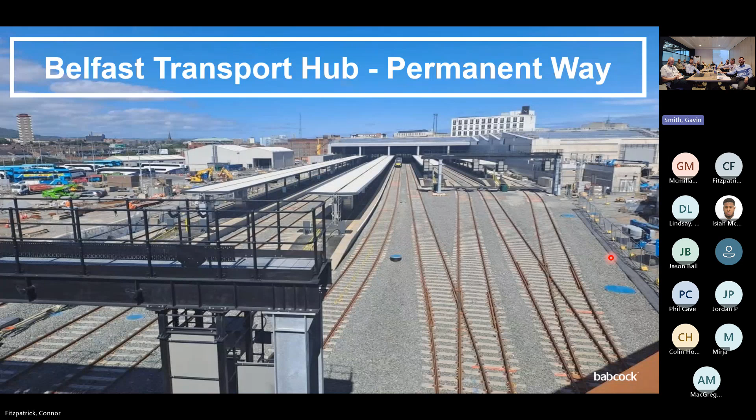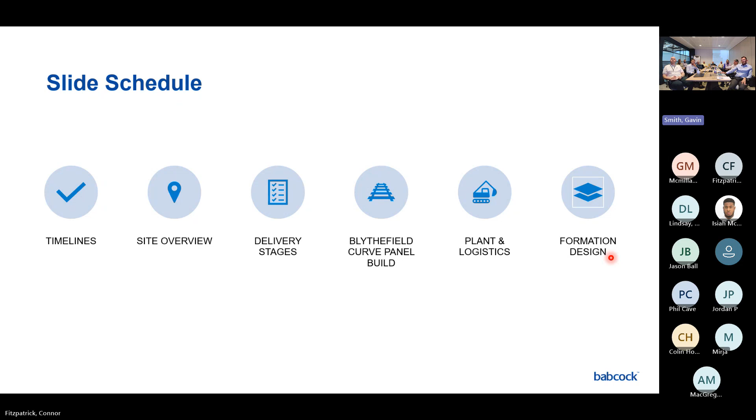Just a quick overview of the schedule for the slides. Kicking off with the early stages, the timeline back when we first started detail delivery, coming through to the actual production timeline up to completion. A quick site overview to help get you up to speed on whereabouts the project is, then moving into the delivery stages, and delving into more detail with the Blythefield curve panel build. I'll talk about some of the plant we made use of, and finally we'll touch on the formation design, which is quite substantial and leads nicely into Ryan's talk where he covers more on the formation.

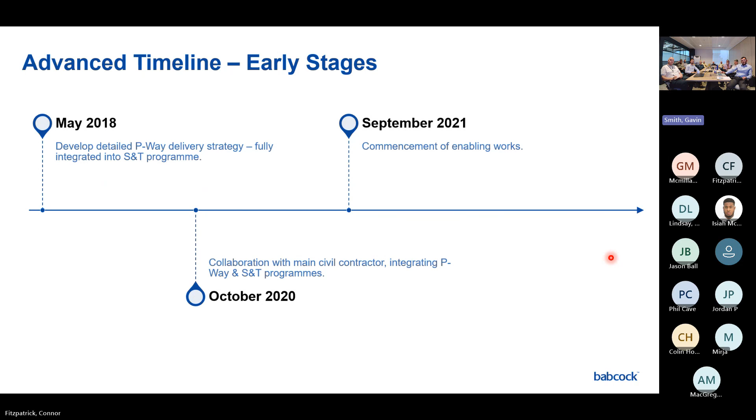Early stages, advanced timeline: we go back to May 2018, when we developed a detailed P-Way delivery strategy, integrated into the S&T programme which had already commenced. That took us up to October 2020, collaboration with the main civils contractor, FSJV, who were building the station and the platforms. Then September 2021 was the commencement of the enabling works.

More on the delivery schedule, P-Way specific: early 2023 was the first of any advanced prep works. Then breaking ground essentially in August 2023 on the non-operational site, within the new platforms, working our way out to the existing boundary fence. Moving up to April 2024, the first disruptive blockade, a small blockade allowed as almost a trial run before the big blockade, May to August 2024, a 13-week blockade. It was split into two parts, which I'll touch on - one part was reduced possession, and the second part was a all line block.

Into Belfast City Centre, and then the autumn of 2024 was the commissioning period.

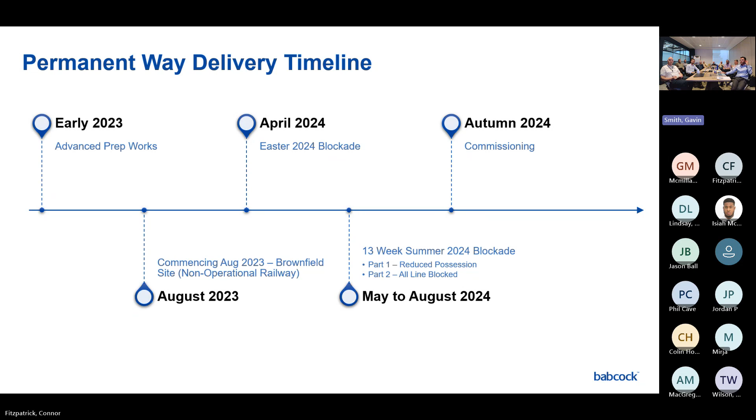Moving on, I thought I'd touch on the old Great Victoria Street station, which was replaced by Belfast Grand Central. You can see in the picture 4 curved platforms, which with maintenance and platform clearances etc, and it was jointed track. Translink really wanted an increased number of platforms to allow for the increased frequency of the Dublin lines, so they took that up to 8, and one of the big changes was straight platforms, just to reduce the maintenance.

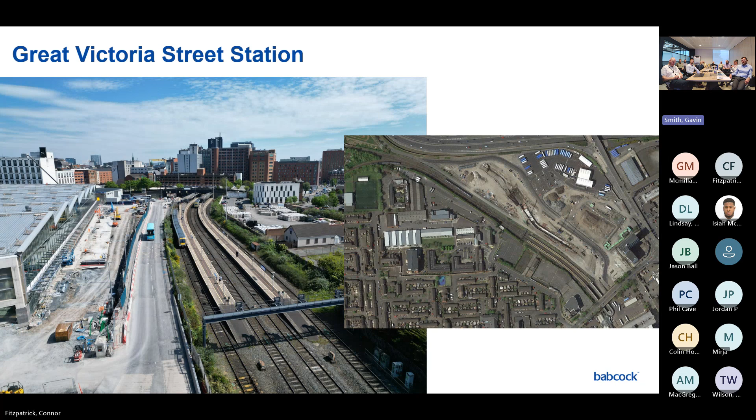Moving forward, in a site overview, we split the job into a number of stages, really dependent on the windows for the blockades or the windows of opportunity of work that we could do. You can see in the top right there is the new platforms, which we referenced as the brownfield site, where all the work was carried out prior to taking any blockades. The rest of the stages are split up dependent on the area of the job, with three compounds servicing it.

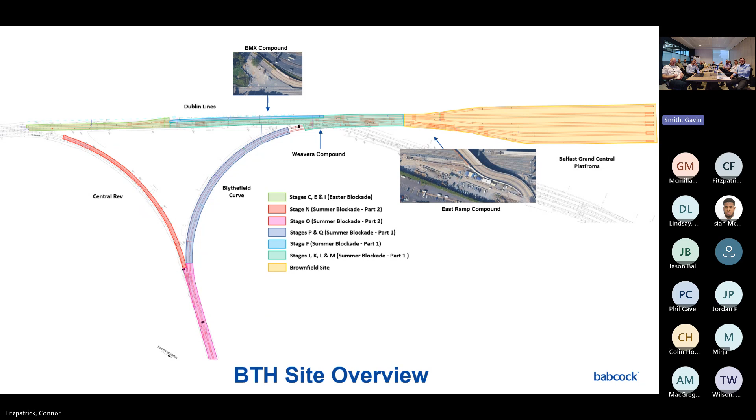So the East Ramp compound, which was initially sandwiched between the old station and the new station. Then the BMX compound at the top of the Dublin lines, which was sandwiched between the station and the Westlink Junction motorway. Tight areas to work within, with a small compound at Weaver's compound, but that was for rail only. The compounds are really servicing one area of the job - your likes of stages N and O, the red and pink, do not have direct access, which was one of the challenges.

So kicking things off, we took over the brownfield site basically from FSJV. Within this area, they were actually contracted for the formation build-up up to ballast level and any associated drainage that you'll see there on the left-hand side. Then we were to come in and build the ballast and the track components on top of that.

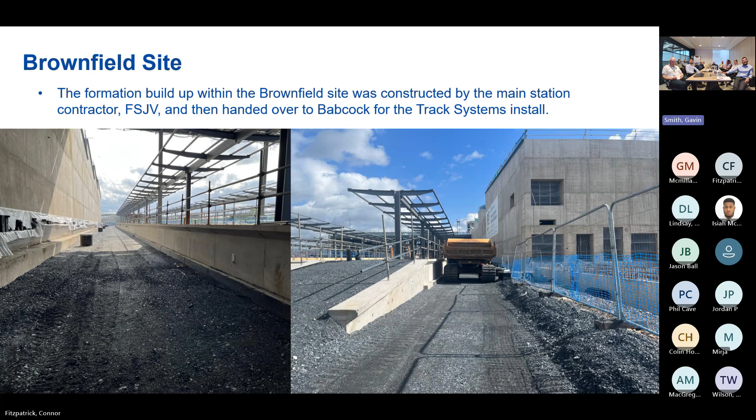So now I've got a picture there looking out from the station. We start to progress on the platforms. This work was completed between August and December 2023, whilst the old station was still fully operational - you can see trains there at the top of the picture still running in and out. The brownfield work allowed us to remove substantial work from the main summer blockade, easing pressure on that delivery and reducing disruption to the public overall.

It's worth noting at this point, huge integration with the main contractor. Obviously, if we were looking to work within platforms 2 and 3 laying track, they were unable to work on the 2 platforms, so substantial integration day to day on this.

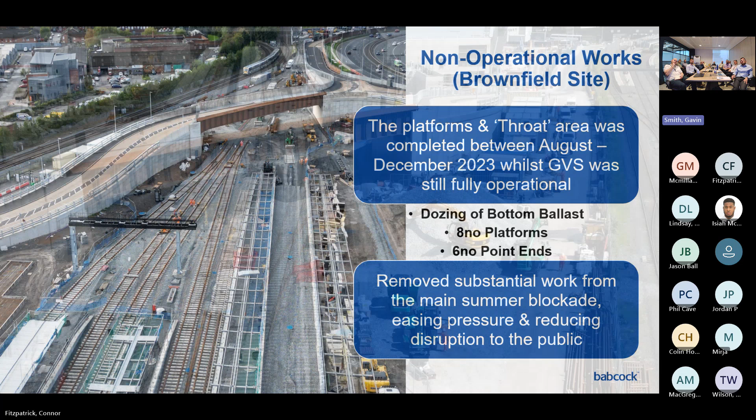This is the picture, you've turned round now, the build's progressing from the station outwards under the busway bridge there. You can see on the right hand side the station, and then in the centre is what we're referring to as the East Ramp compound. So tight access road to manage, and not a lot of room when you're servicing the full works there on the left hand side from the platforms out. Just showing you the tight access points that we had.

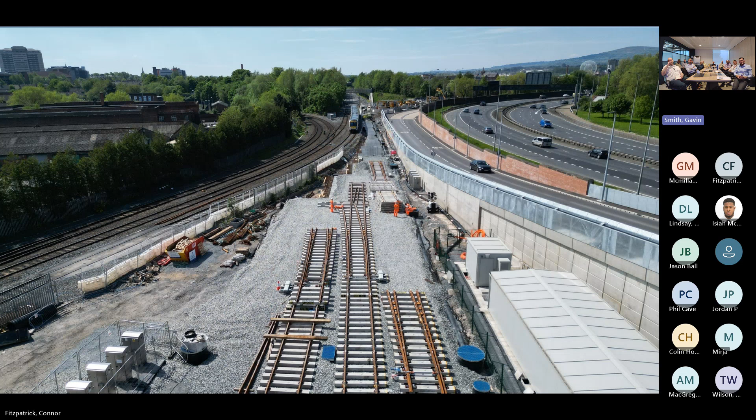We've swiveled 180 degrees, so we're now looking from the station outwards. The brownfield site's key objective was to build as far out to the existing boundary fence as we can. You can see there we've actually half built units S and C prior to getting access to the railway. And on the top of the picture there, between the train and the road, Ryan will touch on it later, but you can see there's actually an area of the concrete foundation slab already poured as well.

So that then took us into the Easter blockade. That was the first disruptive works - basically a length of 170 metres of plain line with formation works on the up Dublin and another 185 on the down. The key point to this was installation of 778 points, which was the commencement of the new line. The existing infrastructure Dublin lines only had 2, the up and down Dublin. This was now to facilitate trains in and out of platforms 7 and 8 in the new Belfast Grand Central.

As it says there, this gave us only a 29-hour possession. It gave us an opportunity to carry out some time motion surveys in preparation for summer and assess the effectiveness of compounds that we're using.

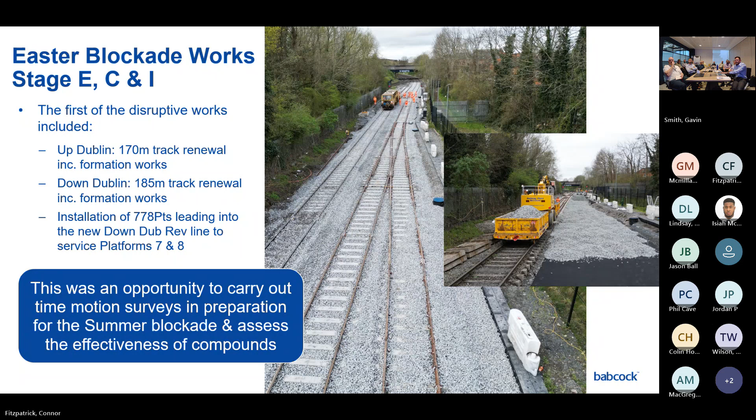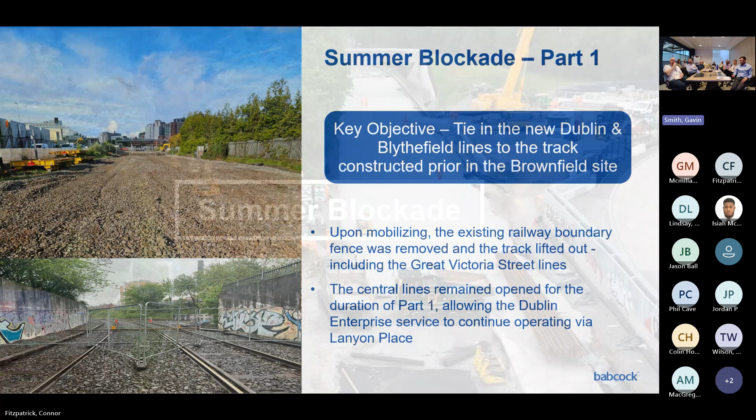So that took us into the summer blockade, 13 weeks in total. Part 1, we still had the central lines open, so still had to facilitate the Dublin Enterprise service, which was travelling into Lanyon Place.

Key objective was to tie the new Dublin and Blythefield lines to the track constructed prior. So we've built out as far as we could. This was now about tying in the new lines into the new station. Upon mobilising, the existing railway boundary fence was removed and the track lifted out.

Top left was the old lines into the old GVS, which we then removed. You can see the east compound on the left-hand side, which eventually gave us scope to increase our compound out into this area. As I mentioned, it allowed for the Dublin, so I've just put a photo there of the physical barrier for the work site.

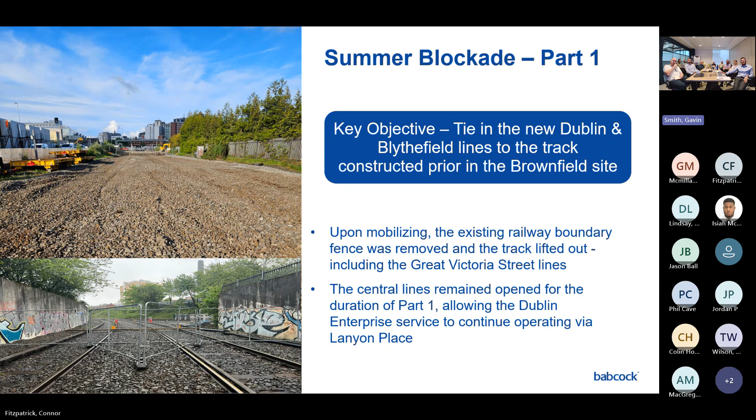So again, Ryan will touch on it, but I thought it was pretty important for me to mention it with regards to the programme for our work.

So a huge part of the summer blockade was the completion of the foundation slab, which formed part of the formation detail. The installation of the slab was a critical activity in the deliver of the summer blockade. Any delays to it would have pushed back the subsequent installation of the track above. So we built in some time and err on the side of caution within the programme, but that was always a risk if that overran, that it was going to push back the construction of the track above.

And I've just put a note there. You can see essentially cut off the brownfield site from the works at the top of the picture. So we had to build in an access road there on the left-hand side just to connect the two.

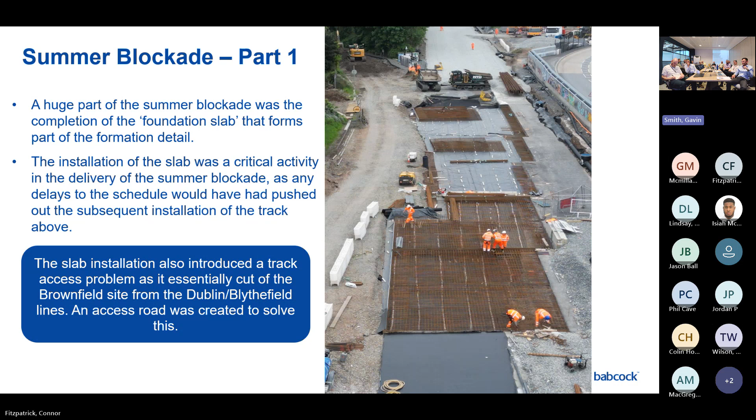Carrying on the summer blockade part 1, what we were calling stage M, that was the Dublin lines. So stage involved the following works.

So formation build up across 3 lines. You can see in the picture different crossfalls to each cess with a build up of 6F, type 1, different layers of terram, etc., which I'll go into in more detail in the formation build up. Transitions between the formation, doze the bottom ballast levels, and then in this stage, it was 800 metres of plain line and the installation of a crossover.

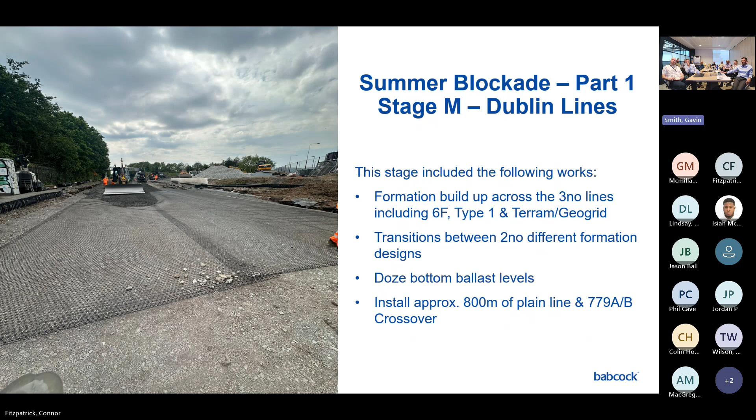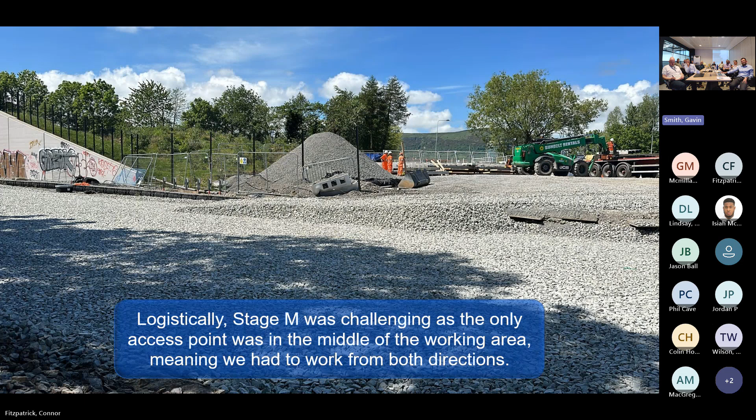And then this just gives you an overview of that. So you've got the 3 Dublin lines there, and you've got the BMX compound on the right-hand side. So you can see our access was actually coming onto the middle of the job. You can see at the top the 779 crossover mid-installation, and that's the 3 lines that would then go down and service the new station.

So continuation of part 1, moved into stages P and Q, which was the Blythefield lines. Methodology a little different, involved the same formation build-ups and those in bottom ballast levels. Also the introduction of some drainage, which we installed in the 6 foot, which was good.

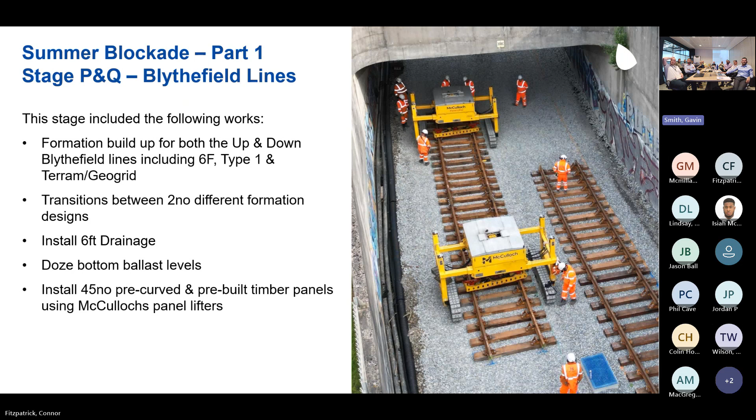So it allows us, while we're building the formation, to build the drainage at the same time for optimal production. And then we installed 45 number pre-curved and pre-built timber panels. Very tight radius here, between anywhere from about 184 up to 250 metre radius. These were installed using the McCulloch panel lifters, and I'll go into a bit more of the engineering on the panel build later on.

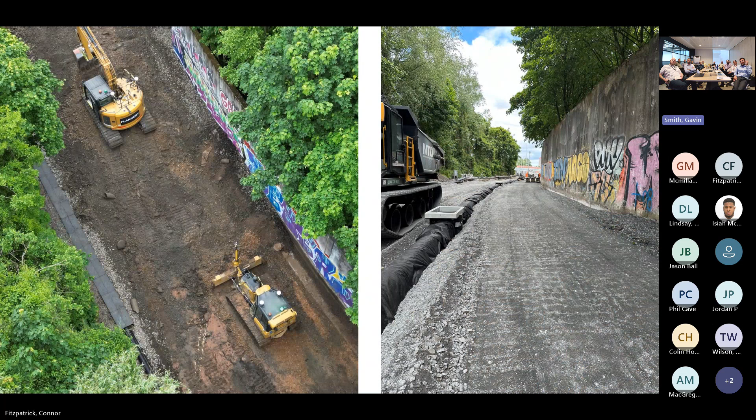Just some more photos there, give you an idea. So on the left, that's us excavating the full Blythefield curve. And then to the right hand side, we've started to build up the layers of the formation. We've installed the 6 foot drainage, beginning to compact it.

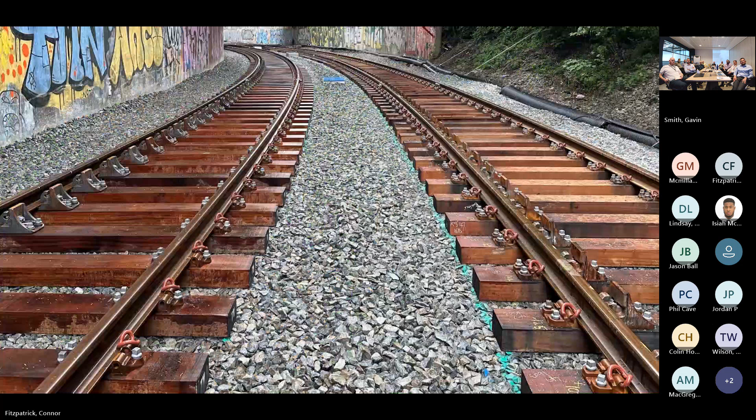And then just a kind of post install of all the curved panels. So you can see that that's pre-tamp. So building the panels beforehand with the pre-curved rail really made a difference to the quality of the install that we were able to provide to Translink.

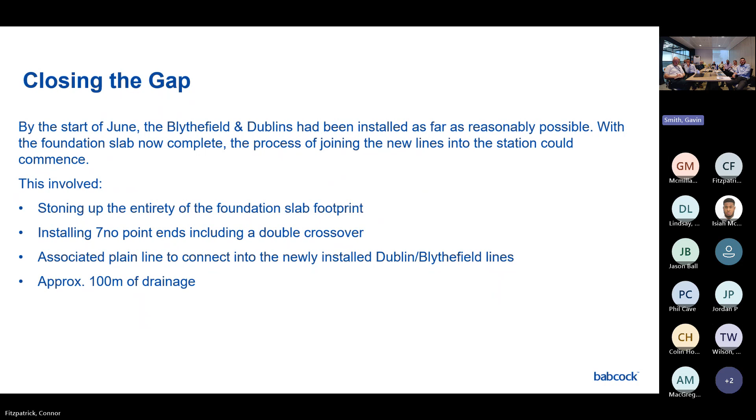That took us on to what I refer to as closing the gap. So at the start of June, Blythefield and the Dublins had been installed as far as possible, with the foundation slab now complete. Process of joining the new lines into the station could commence. This involves stoning up the entirety of the foundation slab footprint, installing 7-point ends, including a double crossover, associated plain line, and 100 metres of cess drainage.

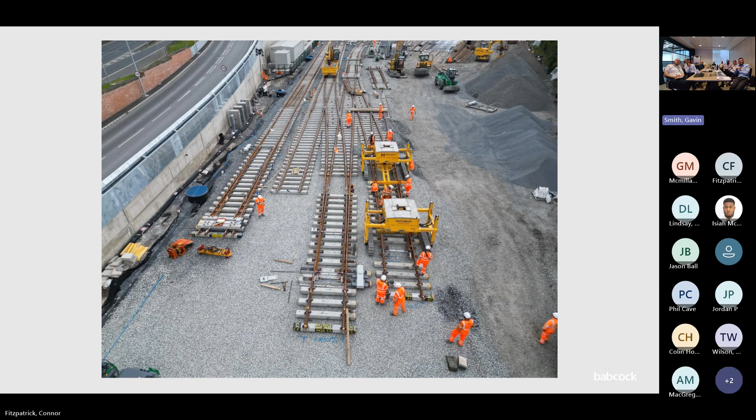You can see just another photo. To the top of the picture is a brownfield site, so you're now working out. We've now got the third line on the left-hand side emerging, double crossover being installed with the two nearest switches, the alpha side 782 and 783 going in using McCullochs.

Which led into the final product for the end of part 1, looking like that. So we've now got access from the Blythefield lines on the top left, the 3 Dublin lines now all going into all 8 platforms of the new central station. And probably at this point, that was the end of the 13 weeks, a huge milestone in the project to have the new infrastructure connected into the existing.

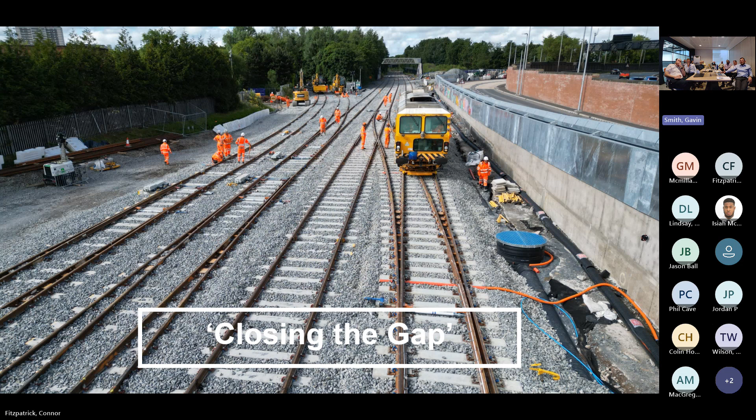That leads us into part 2, which, as I mentioned earlier, was then full line blockade. So the 2 central lines being blocked, the Dublin Enterprise could no longer come into Lanyon Place, with bus replacements instead. But the main works in the central reverse was a reconfiguration from 2 lines down to 1. Now with the main station at Belfast Grand Central, there wasn't the need for 2 lines on this central reverse, and it would only be used sparingly when required. So we dropped it down to 1 line.

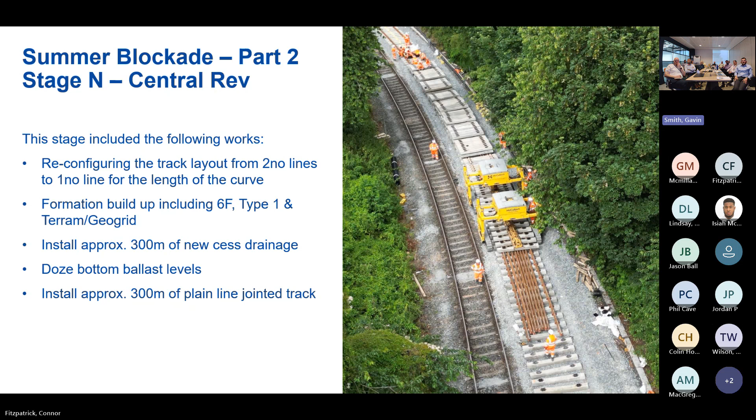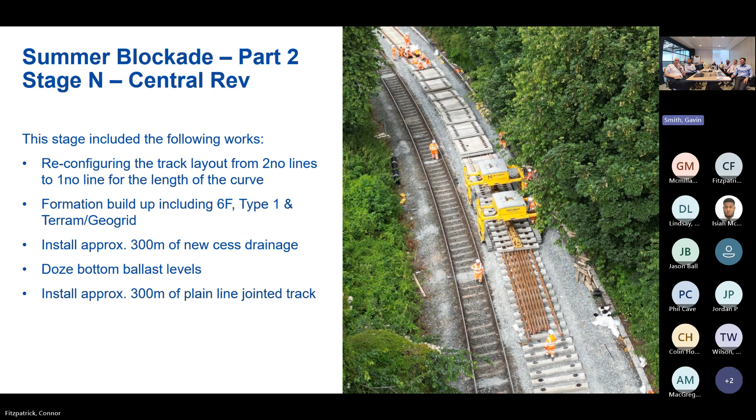Again, formation build up, new cess drainage, and new plain line jointed track. You can see in the picture on the right, we left the existing track in for as long as possible, until the intersection point with the new single line alignment. That allowed us to stockpile sleepers as far down as possible, and then we could run the remaining ones with the sleeper beam where we didn't have any service road, which you'll see in the next couple of photos.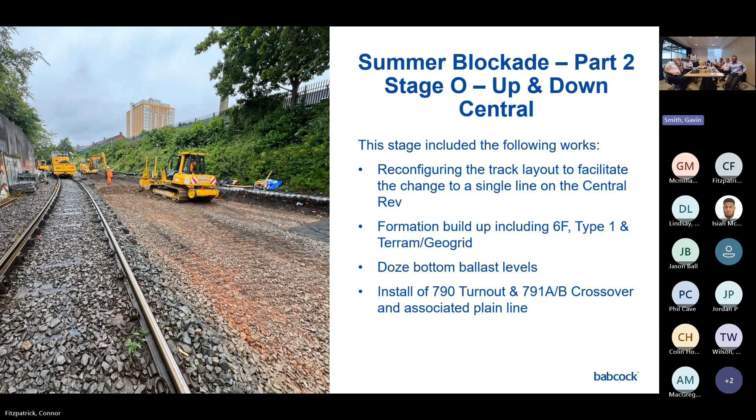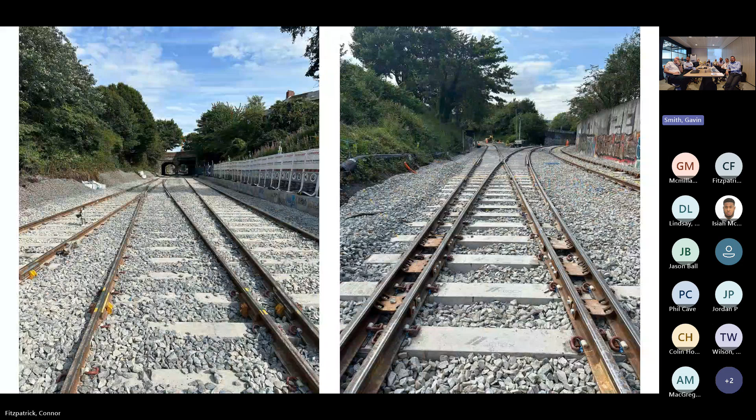Which left the final product, and on the left there's the crossover that's now tying in back towards Lanyon Place into existing infrastructure, and the photo on the right is now looking up the Central Rev that I just spoke about. So at that point, summer blockade, that was all the works complete, all the railway infrastructure essentially tied in. So after the delivery stages, I just want to dive into a couple of areas.

We've got the pre-curved panel build, as I've touched on earlier, the Blythefield lines. So the design was confirmed as to be jointed track construction with an accompanying check rail arrangement.

Now, I suppose a number of factors obviously to consider for Babcock as a delivery contractor: installation methodology, would we build it loose or would we panelise the curve? And then following on from that, would we order a lot of pre-curved, pre-cut rails, cut to suit rail lengths?

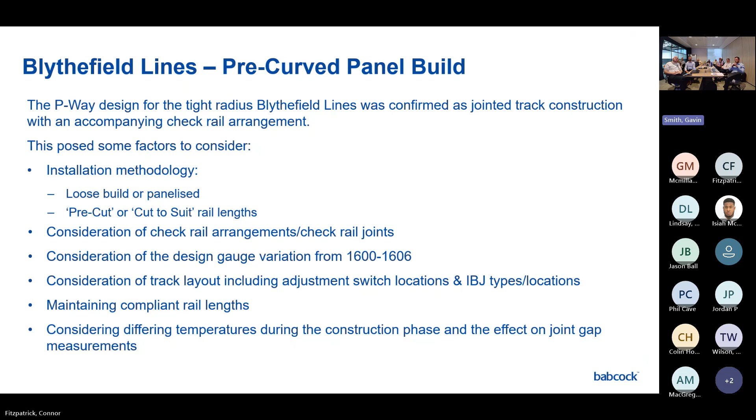That's consideration of the check rail arrangements and the check rail joints, and then also taking into account the design gauge variation. So due to the tight radius of the curve, the gauge actually went out from 1600 to 1606 and then back in. Taking into account adjustment switch locations within the curve, as well as IBJ types and locations, maintaining compliant rail lengths, and then also considering the different temperatures of construction in regards to joint gap regulation.

So our chosen methodology was to panelise the layout. This involved ordering pre-curved rails and IBJs, designing with a mixture of predetermined rail lengths and cut-to-suit pieces, allowing for some constructability tolerances.

We went back to first principles to establish leads and lags, using CAD to design each panel and ensure accuracy when constructing. A panel schedule was created to ensure correct order of construction and installation, and again we made use of McCullochs, which allowed us to install both roads at the same time, working back towards the compound.

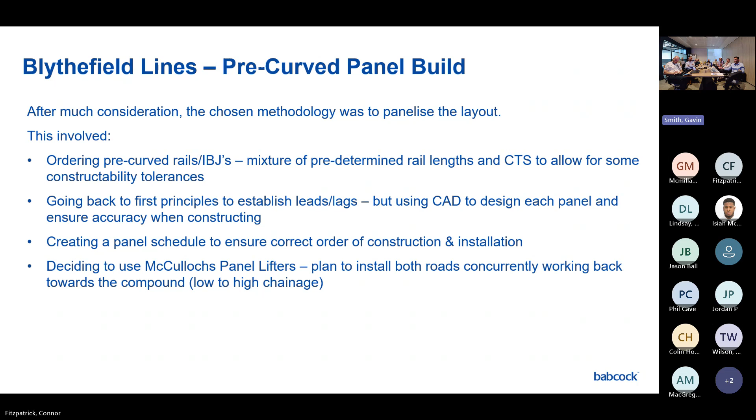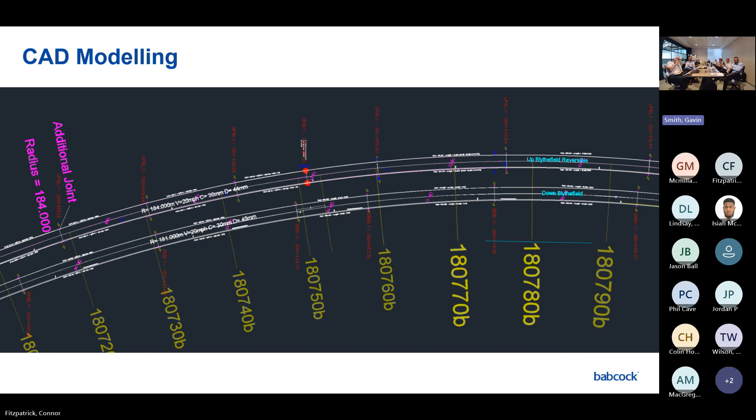Here's a snippet of what we ended up overlaying. You can see the small pink writing with labels of the panel numbers and where the joints fall. That was overlaid against the existing P-Way design CAD file.

From that, we were able to pull out panel diagrams. Each panel diagram showed the length of the rails, both inside and outside, sleeper spacings, the radius, and the gauge. The pink writing on the left and at the rail ends was how it came up from factory, to allow for easy identification on site. These diagrams were given to a team who worked on building these off the critical path, in the compound.

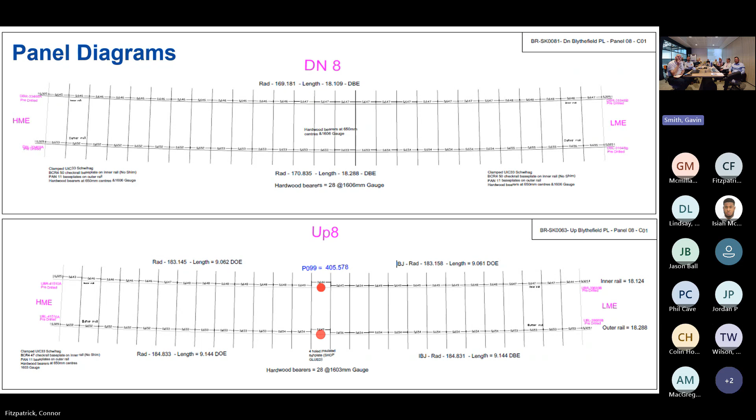Moving on to some of the logistical challenges. The hub was always a challenge due to its location within the heart of Belfast city centre, so interfacing with the main works contractor within the station area was an ongoing challenge.

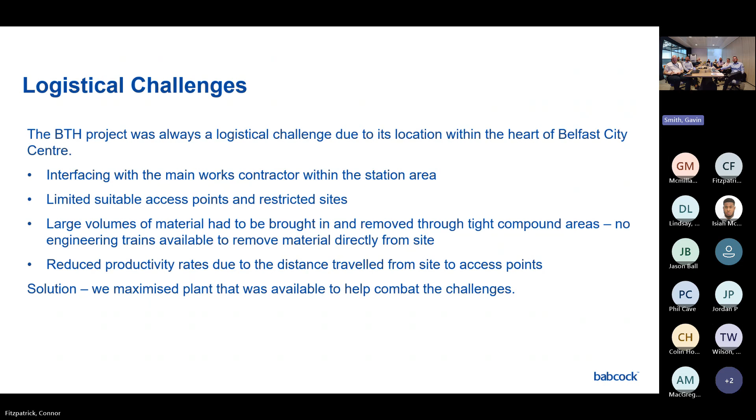One of the solutions was to maximise the plant available to us over in NI to help combat some of these challenges.

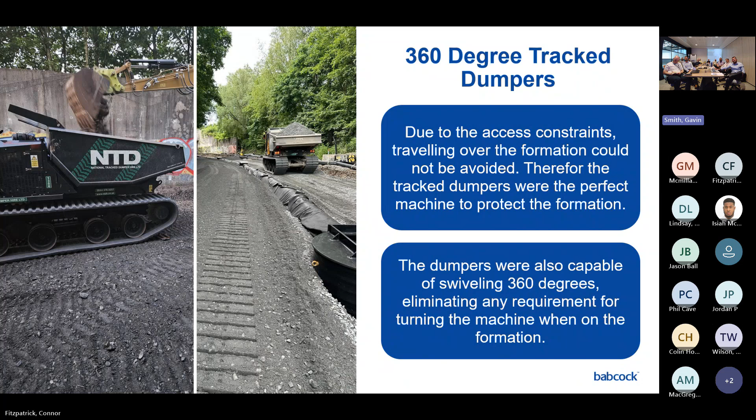We also set up what was as close to an engineering train as we could, using a Unimog complete with trailers. This helped massively during part 2 of the blockade, where there was limited access to the further away sites.

The trailers could be used almost like side tippers, similar to a conventional side tipper engineering train on the main line, and they could also stone up almost like a mini ballaster as it travelled over site. These were a great help during blockade part 2.

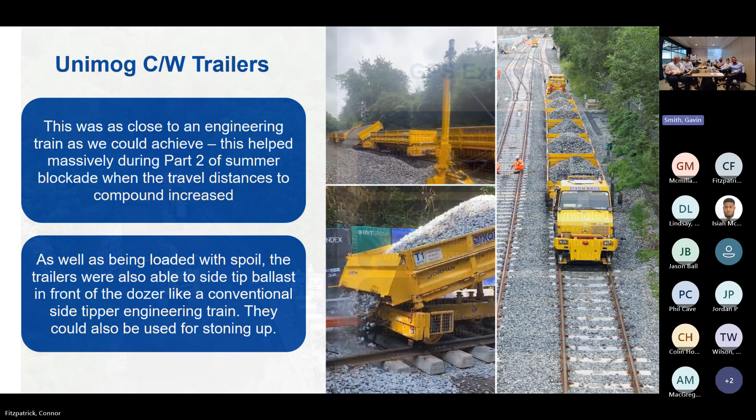We also used GPS excavators, given the limited space in compounds and large volumes of material to remove. GPS excavators made this as efficient as possible - machine control files eliminated the chance of over digging or digging too wide, and we also created drainage excavation files which increased production as well.

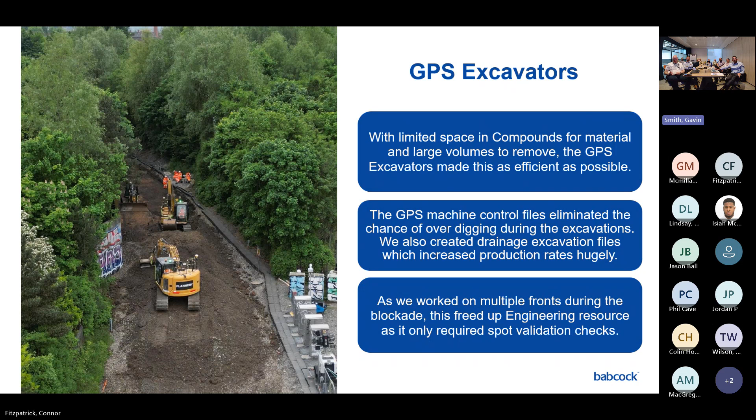GPS allowed us to work on multiple fronts and freed up engineering resource, as the machines only required spot validation checks because they already had the file loaded in the machine.

Moving on to the final thing - the formation design. It's quite substantial. Here's a snippet of the main throat area showing the different track formation solutions. Solution B, top right, is the foundation slab, which Ryan will touch on. The other one not in sight is track solution E, which was within the brownfield site produced by the main contractor.

I'm going to focus on the next slide to give you an idea of the transition between the pink and green on the drawing - transition detail 2.

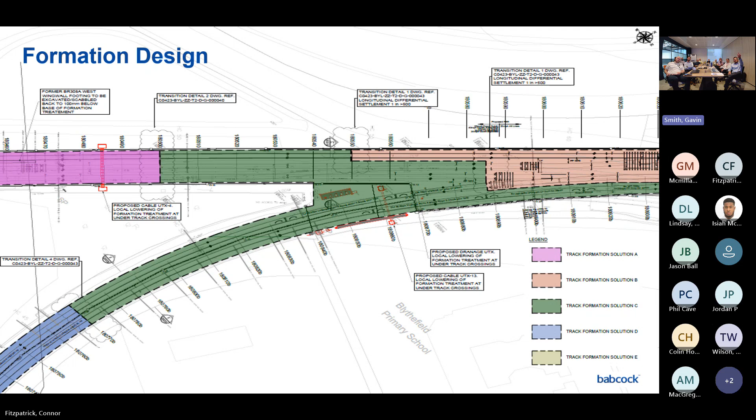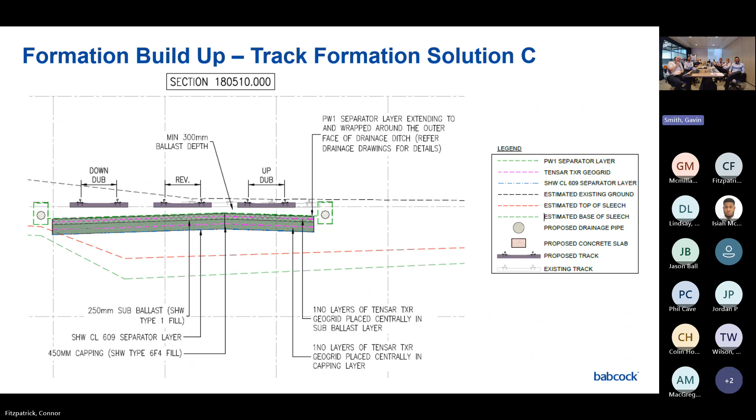Moving on to solution C, which was substantially deeper. The same configuration with type 1 in the layers, but with an additional 450 mil cap layer, a 6F4, which again had another geogrid in it centrally. So a lot of layers to build up with the access that we had, and a lot of layers to compact, which proved challenging. That was to give you an idea.

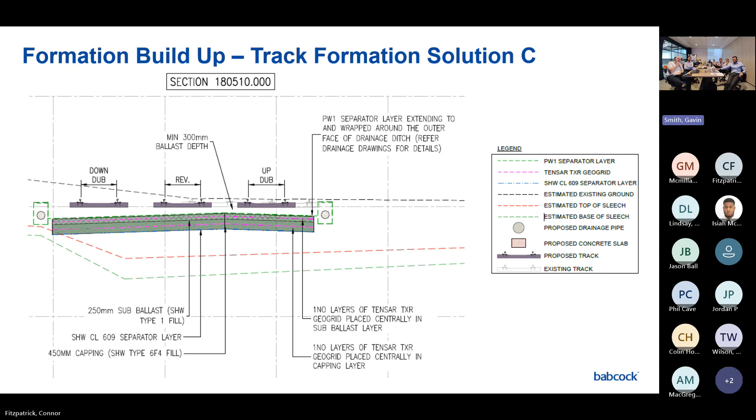And then just a mention on the transition detail between the two, which was quite complex. There was a 10-metre transition essentially from solution A to solution C, a 5-metre overlap into solution A, and then a 5-metre ramp down into the deeper formation treatment. You can see in detail B this wasn't really practical to construct, and in the end, instead of having the 50 mil layer from the separator to the first layer of geogrid and then another 50 mil to the geogrid, we put the first layer of geogrid directly on top of the separator layer and then kept the next layer 100 mil up to that. But you can see the kind of challenges with the different formation treatments we had.

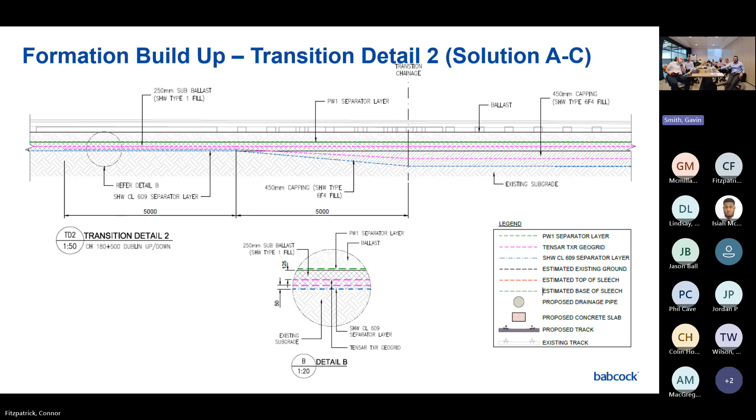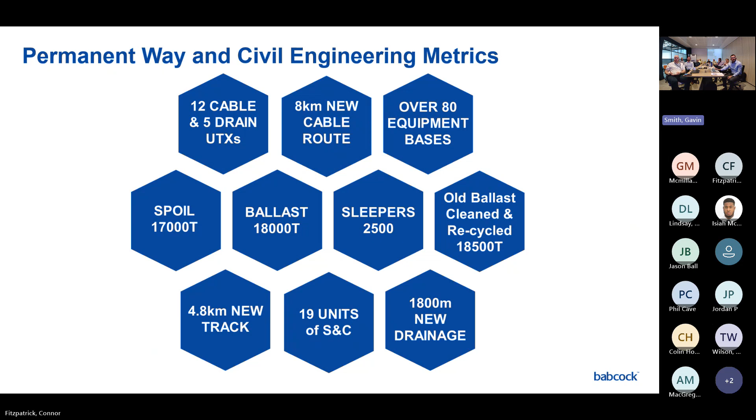For me, I think I'll pass on to Ryan now, who's going to touch on more of the civils aspect you want in here.

Okay, so Ryan McCoy, and I have the pleasure of presenting to you today on Transport Hub and the civils elements. So to us we call it the Belfast Transport Hub, but the station was known as Belfast Grand Central. The project is now nearing completion, and it's the largest integrated transport hub on the island of Ireland. The project is also the largest railway interlocking constructed outside of London in the last 20 years. For me, I was the civils CRE at the end of the project and the temporary works coordinator.

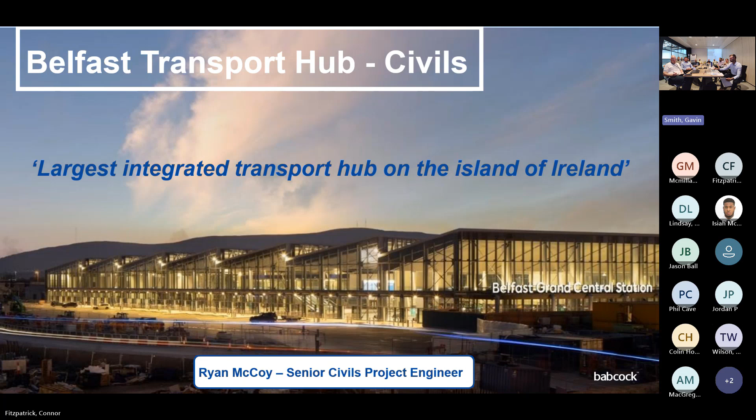So I'll give you a bit of my insight to the project. The project was first talked about in 2012 and is due to be completed later this year. The station is now operational.

The old facilities in Belfast had been operational for the last 29 years and had basically remained unaltered from the day they were installed. They were operating at full capacity and hence called for the improvements. The new Grand Central Station has 8 new railway platforms and 26 bus stands in a state-of-the-art building, catering now for 20 million passengers per year. The new station has increased capacity for up to 2,000 seats per hour for both rail and bus movements in and around the city and beyond.

The image to the top right of the slide shows some of the key companies that made this project a success. As can be seen in the slide, Grand Central Station is exceptionally close to Belfast City Centre and Belfast City Hall. The project is strategically positioned between the 2 main universities in Northern Ireland and the 2 largest hospitals in Belfast. This presented its own challenges during the construction phase, as you can imagine.

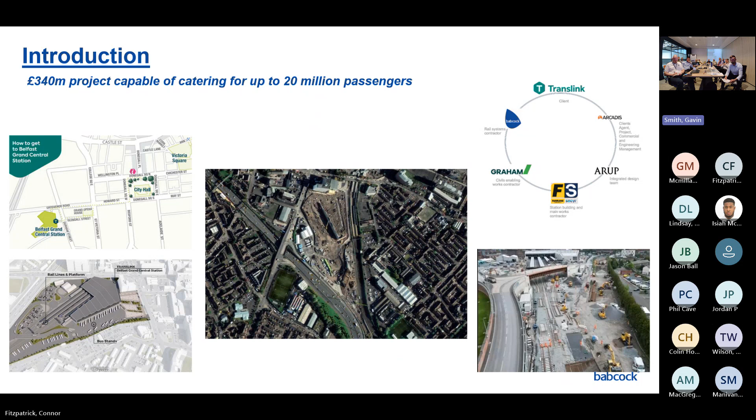The middle picture on the slide shows the construction site during the enabling works, with the picture to the right showing the old station now demolished and the interim works to connect up the new station to where the old station used to cross over. The project was originally estimated to cost 175 million, and it is now expected to cost closer to 340 million. The Babcock contract was for 56 million and was completed under NEC option C.

So moving on to the ancillary civils. To protect the programme and reduce the overall risk profile, the ancillary civils work was predominantly completed on T3 possessions, working rules of the route. So this is basically between the last train in the evening and the first train in the morning. Babcock managed and delivered these works for 18 months, maybe even slightly longer, prior to the station opening. Working alongside various subcontractors, we managed them to complete as much work as possible in advance of any bigger blockades.

This was basically to protect the programme overall and ensure the successful delivery of the project.

The project covered almost 7 miles of predominantly dual line track, passing through 8 different stations. It was crucial to consider other disciplines, possession arrangements, and access for both plant and personnel, because they weren't the same. Working with various subcontractors on a daily basis, we conducted weekly meetings to track progress, programme, and review any on-site problems.

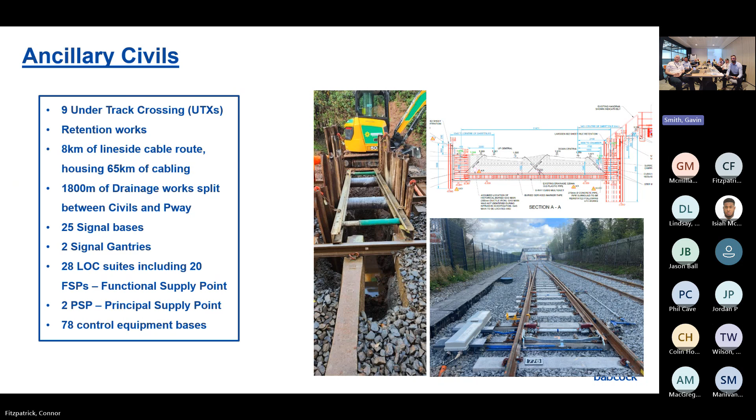This is basically the safe methodology of what we do. The picture in the bottom right of the screen, to most, is a railway line with a wee bridge in the distance. Although for a civils man, you look at the troughing on the left-hand side and the drainage as well, not just the points and all the fabulous stuff that Connor has explained. But without the civils elements, the railway wouldn't have its intricacies as it is.

Moving on then to the foundation slab that Connor's already touched on. The railway corridor was widened on the approach to the new station. It would now pass over a section of land which contained Belfast Sleech. So what is Belfast Sleech? It's a mixture of estuarine clays, silts and peat.

Its exact characteristics vary drastically and present very difficult building conditions. It's considered one of the most problematic soils in the UK, and in Belfast it can be at depths of up to 8.5 metres.

Therefore, with the expected volumes of traffic on the approach to the new station, the solution needed to be one that would not require a large amount of maintenance in the years to come. A concrete reinforced slab of depths up to 700 mil would be required, and the slab itself consisted of over 1,000 cube of concrete.

As shown in the design drawing, this slab would be poured below the bottom ballast, so it's known as a track slab, which some others would know traditionally. When Babcock was presented the design, TransLink had already engaged and looked at the constructability of the slab.

The design to the right-hand side of the slide shows a sheet piling design, which was to enable us to construct the third line area. This consisted of 12 and 14 metre long sheet piles installed at approximately 1.5 metres from the nearest rail.

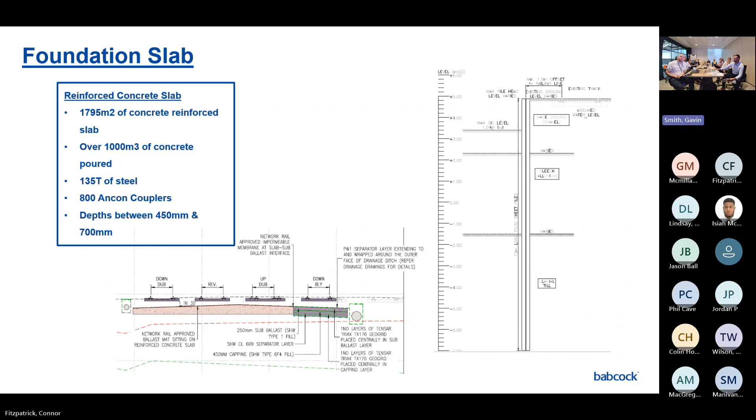Once I'd reviewed the design, I engaged with various specialist subcontractors to pull together suitable solutions to complete the work. However, due to the work being sandwiched between an operational busway and an operational railway line, the prices received back were excessive. The image to the top right of the slide shows a drawing that I produced to ensure that the piling rigs required would fit on site. Space was precious, and only a piling rig with an articulated boom could be used.

From the onset, I always thought if we could remove the need for sheet piling completely, this would be the easiest method of construction. I explored constructing the entire slab during a large blockade, although as you would expect, we didn't have the time for this. This didn't work as the sequencing of the P-way also didn't align.

Due to the substantial cost of the piling works themselves, I started to think of more alternative solutions to construct the slab and still have safety behind, to allow the operational railway to run. A key driver was being able to construct as much of the slab offline during the day and to avoid rules of the route, which is basically nighttime working, as this would put the cost of construction and the duration up exponentially. This made me consider other forms of retention to facilitate daytime working.

Through various iterations, we presented the photo in the bottom right, which is a Legato block wall system, to the client. Instead of installing sheet piles adjacent to the track, we suggested building this legato block wall. Consulting with the temporary works designer, we refined my initial ideas, and as shown on the slide, the wall would sit within the track support zone, shown as the purple line on the slide. For those that don't know, the track support zone is the area beneath the railway line that is necessary to maintain its integrity.

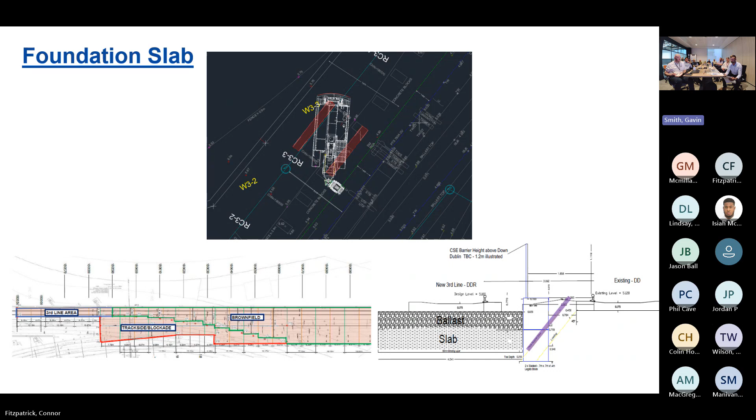This was a successful turning point for the construction of the slab though. I worked alongside a piling subcontractor, and I pulled together a plan to construct the 40-metre section, the finger section, in a condensed and realistic programme. The solution was to construct this area at Christmas time.

This meant that during the blockade, the excavation, blinding and construction works would all need to take place. The excavation works would be constructed with a suitable angle of repose. Basically, there would be no temporary works. Subsequently, this meant that the adjacent track and sleepers would become temporarily unsupported. This would only work when there were no trains, and hence we needed to do it within a blockade.

So the civils work would continue as planned. Upon completion of the civils work, there was 2 days allocated within the blockade to backfill over the slab and reinstate the ballast accordingly. Tamping was completed and the track slab was handed back with the initial 40 metres all poured. The blockade was very short duration and required some swift construction methods.

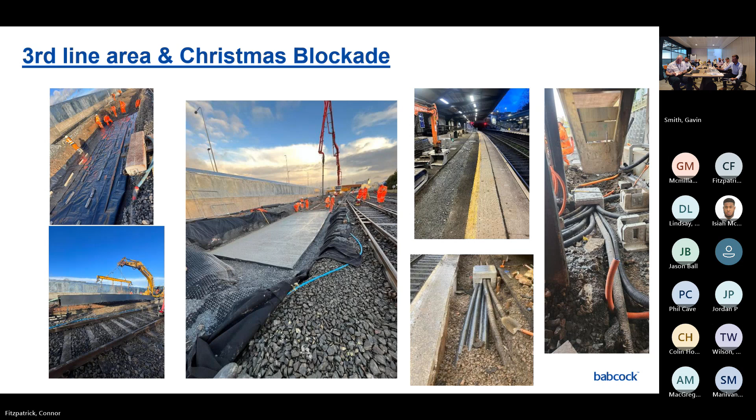Moving on to the brownfield element. Following the Christmas blockade, works on the slab continued, constructing as large a section as possible offline before completing the remainder of the works in the summer blockade when the old station was actually closed down.

I maximised the area of the brownfield slab by implementing a CSE environment. Ultimately, this makes the area into a high street environment. This removes a lot of the restrictions set by working on or near the operational railway line, allowing the construction of the brownfield slab to take place on day shifts adjacent to the railway line with some additional control measures in place to ensure compliance and health and safety. Ethically, with the position of the job right in the centre of Belfast, this was the right thing to do for both the people in the nearby area and the construction workers.

I supplemented this with the use of Ancon rebar couplers to remove the need for long lap lengths between the different pours, maximising the amount that could be constructed offline.

As the temporary works coordinator for this project, part of my role was ensuring temporary works for cranes and platform designs. I worked alongside my PWI colleagues to allow for cranes to be set up on top of the reinforced concrete slab, and this facilitated the building of S&C units, which allow trains to cross over between different railway lines.

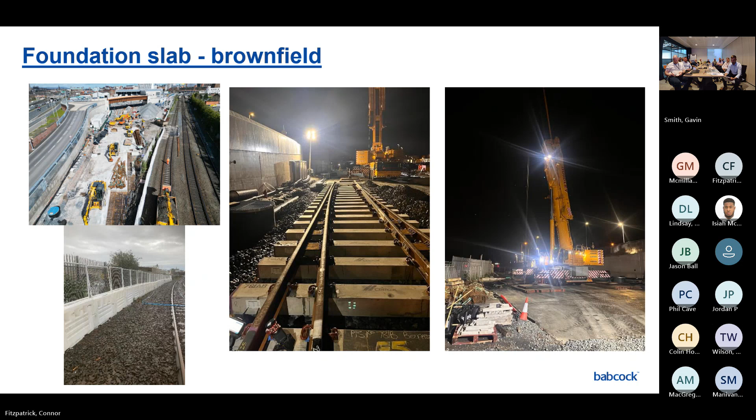So moving on to what I called the bottleneck. The phasing and management of these works was no easy task, whilst trying to programme the delivery of the slab around the ancillary civils work, the drainage work, and whilst PWI pushed on with their construction build of the track, in addition to ensuring that E&P and S&T colleagues could have access to get to their elements of work also.

With a large element of persuasion, Translink granted Babcock a 13-week blockade to close down the old station and link up the new railway line. A 13-week blockade is virtually unheard of on the network. However, given the complex nature of the project and meeting at this bottleneck, it was necessary to deliver this project.

This was the largest blockade completed in Ireland, consisting of a 13-week blockade over a 91-day period, 280 shifts, and over 100,000 man-hours. The pictures on the slide show some of the construction work during the trackside element on the approach to the new station, showing the intersection of the Bangor line, the Portadown Newry line, and the adjacent Dublin line.

Due to the available space on site at this pinch point, the first 5 weeks of the 13-week blockade was predominantly for civils to deliver the remaining element of this foundation slab. I was responsible for ensuring these works were delivered and managed effectively throughout, as a delay at this first phase of the blockade would have a knock-on effect to every other discipline.

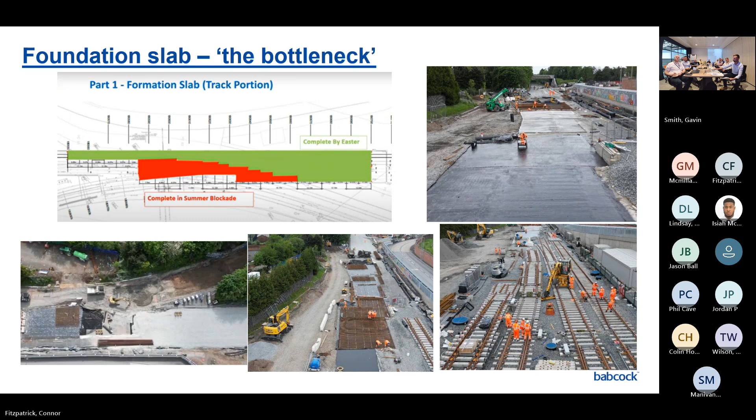So to conclude, a major milestone for me and a large number of the BTH staff was completing this project alongside the NIROC project. NIROC, the Northern Ireland Railways Operating Centre, was a project to modernise 3 separate signalling control points and rationalise them into one operational facility.

The civil scope included 400 metres of cable route, both surface and buried, FSP foundations, the creation of a new PSP and compound, and associated route works. The new facility was programmed and constructed in line with the BTH project, as NIROC had overall control.

And this completes my presentation. Thank you for listening.

Thank you, guys. Have we got any questions in the room?

I'd just like to say, that was a tremendous presentation, well presented, and can I specifically highlight how good the photographs were. It gives you such a clear picture of how you constructed everything. Brilliant, absolutely brilliant.

I'll kick off the questions. It looked like it was a very well executed project, but was there anything with the benefit of hindsight that you would have done differently, within either discipline?